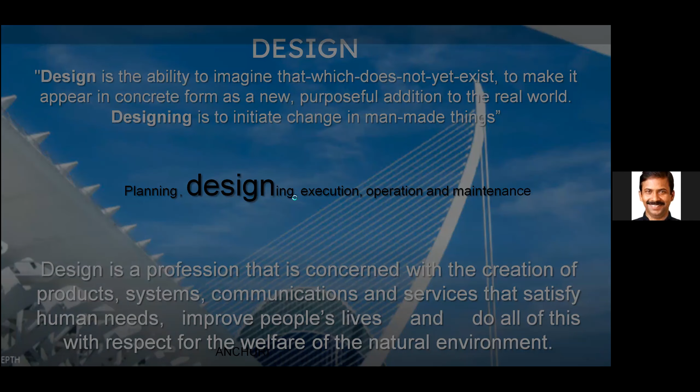So when I say categories of design, before I go into material, we need to understand what is design. There are so many - communication design, web design, information design, education design, environmental design, interior design, sound design for auditoriums. If you have some kind of hospitality sector, we need services in place, then interface is required, experience design is also there. If you have some publication, we need some write-up, then editorial design, typographic design, user experience design. So game design, emotional design, strategic design. Above all, today we have software design, which is entirely helping us do engineering design and all.

Before going further, we must understand the categories of design, so that definitely we can play an important role based on our own domain.

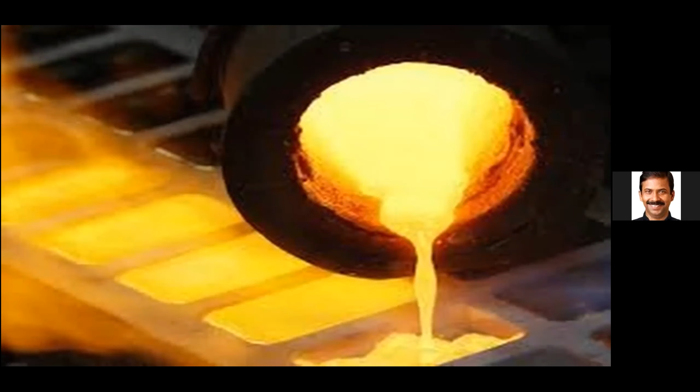Friends, you can see this piece. The moment I show it, you may be saying this is some kind of metal. This is a gold piece. This gold, when it comes from the mine, has to have some process. So naturally, when the gold is processed, then we get some kind of this form. Based on the quality of the metal, the purity of the metal, we say it's 24 karat, or 22 karat, or 18 carats. But normally this is in the pure form.

Now, when I get this, then I go further with the requirement that maybe even these ornaments - so the processing starts, and here design comes in picture. But before design, the requirement comes in picture. I think concrete and gold, they are almost there right from the beginning. In fact, we can see in the metallurgical sense, they are playing importance like clothing - they had clothing, or they used to cover their entire body with gold ornaments. So the requirement, how it goes, we need to understand.

In fact, when you see this, the Golden Temple - this entire cladding of that particular structure was done by gold sheets or gold plates. You can see here, this is the building, and this building, normally in construction point of view, material-wise point of view, same, but this particular type of building, when we clad it, became golden. You can see the reflections, you can see the sanctity of that. So we must understand the material, how to go about it.

In fact, today we are using gold for teeth also, bracing also. The purpose may be same, but we have some kind of elegance and beauty we need. So definitely, why should we not use this as a decorating piece? It's not only for ornamentation, but that serves as a purpose - that serves as a requirement of the medical things.

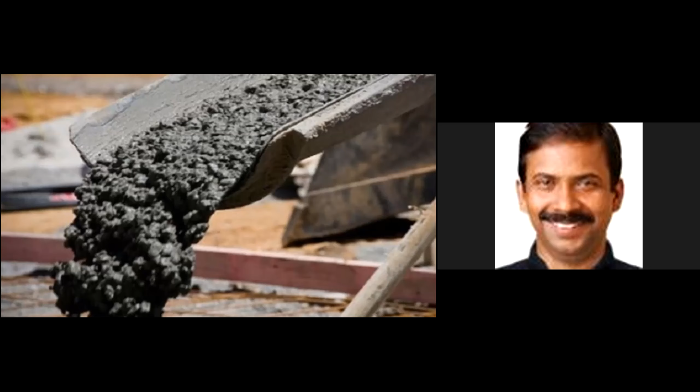That particular thing, in fact use it. So how to go about it? Then this particular thing is made. Say today we are using ready mix concrete, or some kind of cast in situ, but today we have latest technologies which can be used for the making of concrete. So this is very important when it comes to the making of concrete.

So then we change the forms. There we had the biscuit form. Here we have cubes. Now these cubes, maybe to test the cubes we might have done it, but we can make different sizes and shapes of blocks which can be used for masonry work. And it has replaced what used to be stone masonry, natural rock. So it has been replaced by artificial rock, which is concrete.

So when it comes to concrete application, friends, believe it or not, whatever material we are making, for an architect or for a designer or the person who is trying to apply it, he definitely takes care of the design requirements and the material available. So it's the period gone that 1:2:4 or 1:1.5:3 or 1:4:8 we used to say. It has come much ahead now.

Naturally, the modern structures are not like earlier structures, because the earlier structures had different requirements. Today we have a different requirement. We can't compare with the pyramids, which were solid at that time, but today we have voids. We are going towards more functional spaces. So we must understand the requirement - what we can make, some structural elements, some non-structural elements.

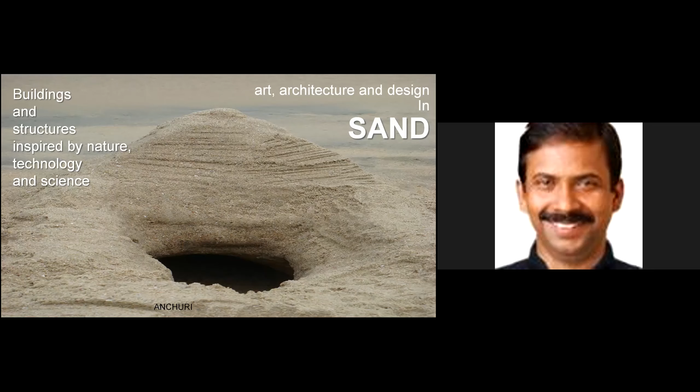But this particular inspiration got to Tadao Ando, who is one of the world-renowned Japanese architects. In 2017, the work was extensively published. Here you can see it's about 1.5 lakh square feet carpet area with a 40 meter tunnel which you go inside. Even that particular statue is about 13.5, about 40 to 50 feet. So we can see the massive scale. But I resemble this with the sand model what we saw in nature.

So we must understand, in fact, when it comes to structure as an articulation, for you or for me, maybe the load is important. When I say based on the deflection criteria, based on the spans, based on the height, based on different load resisting parameters, we have this kind of structure. It can be a plane, it can be some kind of theme. Here you can see how the articulation, how the sciography is playing the vital role.

In fact, these small changes, or this kind of rhythm, we can create by properly integrating the material, design, and concept. So today the world is for optimization, because we always feel that we should use less and we should get more.

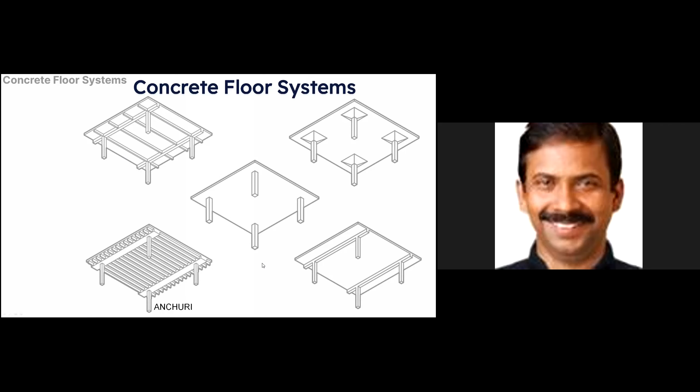So here the material plays a very, very important role, because naturally when it comes to the selection of the system, here you can see how, if I go for the post-tensioning of structures, this is very important for me.

Because every 10 floors, if I save 10%, I get an additional floor. It means just by structural design, just by proper use of concrete grades, reinforcement and design, I can save the height by 10% of what is required for one floor. So every 10 floors, I get one floor.

So if you construct about 40, 50 or 60 story buildings, naturally we are getting about 5 to 6 floors extra, which can make us affordable, and naturally the elegance also comes.

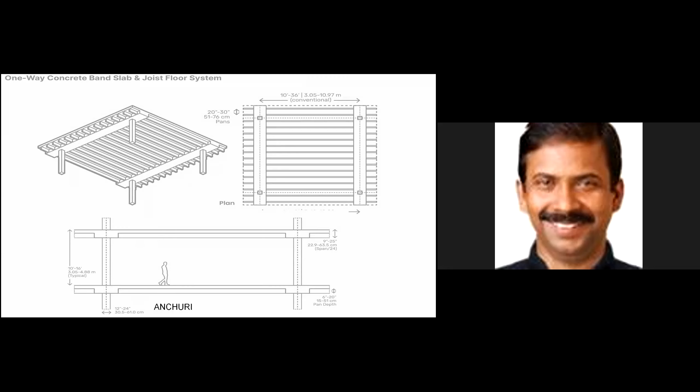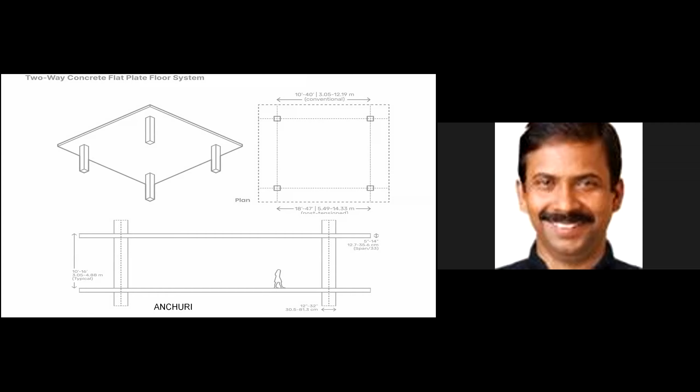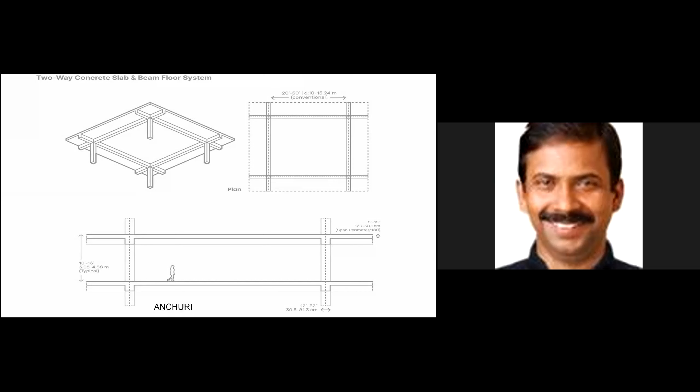So we have different kinds of structural systems, and the heights can vary accordingly. We can get clear height with one-way concrete joist, or one-way concrete slab with beam floors. Then we can have one-way solid concrete slabs, or just a slab, the flat plate concept, then drop panels with flat plate, or regular two-way beam systems. We can also have waffle slabs, which are elegant, and earlier we used to use that in many systems before post-tension and precasting came into affordable use.

So friends, here you can see decorative concrete, which has developed into one of the most important means of design in modern architecture. No other building material can be used and processed in such a versatile manner. You can see these 20, 25 year old structures, how elegant they are - the color, how vibrant, and how the sciography creates vibrancy in the spaces. We need to understand the use of that.

In fact, it's imaginative, inspiring, and catches the eye. Decorative concrete provides a connection to the landscape and the building, through forming, placing and finishing to exacting quality standards, because decorative concrete has more QA and QC. So naturally the productivity will be accordingly.

In fact, the concrete can take almost any form, any texture can be developed on it. Today, due to advancement in pigmentation, we can achieve any color, and it enhances the appearance of the building along with structural or functional requirements.

As per me, decorative concrete offers a different range of surfaces, from smooth to rough, or the spectrum of colors, as I said. So concrete, while providing aesthetics to the building, also serves as a functional system.

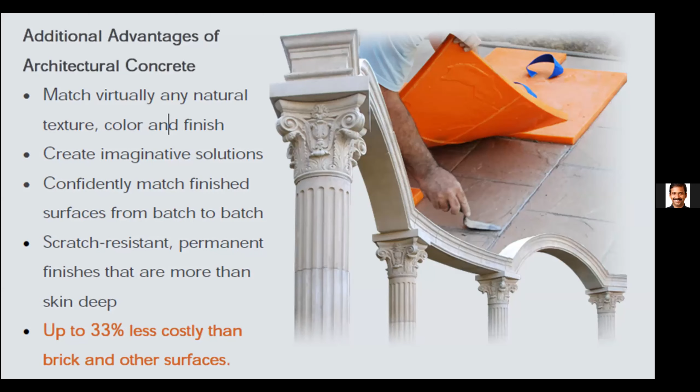The scratch resistance or permanent finishes can be really developed in decorative concrete, and as I said, up to 33% we can save on it. The concrete, which is enduring, comfortable, and beautiful hardscapes, you can see how these things are developed. For driveways, pool decks, and other exterior environments, decorative concrete treatments have become an increasingly popular choice now. Because today, if you go to resorts, common spaces, villas, or gated communities, the use of concrete is making a lot of presence.

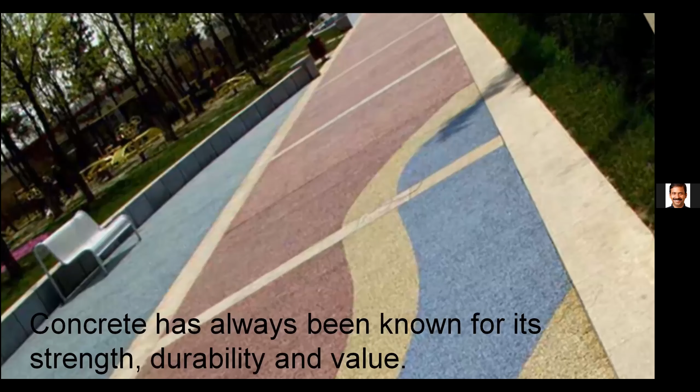So here, as an academician, researcher, or developer, we must understand the requirement of the society, because the user's mindset is very important. From there it really comes, because today we have a lot of change in mindset, since easily we can see any part of the world, any part of the globe on screen. So we know the development. It's not local - we can sit in the local and think of the global.

Earlier, we used to say concrete is very dull, very boring material. No, it's not. Concrete is a material - in fact, I can compare it with any rich material like platinum, gold, and silver.

The impression of the color and the message it conveys is of utmost importance in creating the psychological mood. If something is dull, we may be thinking that atmosphere is dull. Continuously having the same ambience, we need some kind of change. Then the color came - the color things, and we can have any color in the concrete.

So that is what integrally colored concrete is, and that is what the present requirement is. Definitely, you can develop this.

For me, white is also a color. So white cement concrete surfaces, in fact, that is iconic. I always compare it to politicians - their leadership is on one side, but their costumes, their dress, they wear a white kurta, pajama, or white attire.

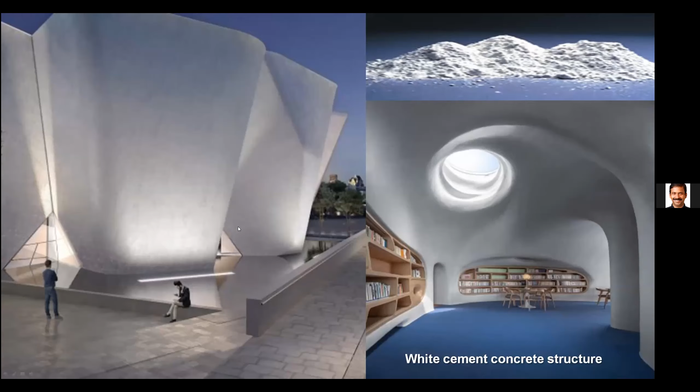So we need to use it properly. Even if you are given very good proper white cement and white material or concrete, I need to use it properly. So here the integration comes right from the conceptualization to the usage.

So today we have stamped concrete, because nothing beats the appeal of traditional slate, brick and stone paving, unless the appearance of these popular favorites is combined with concrete's long-term performance and economy of installation. As I said, we can do it with less expense, but people will accept it if it's on par with the natural things. So we must take it in a way that is required.

Naturally, the technology is on one side, but the skill is another side. If you visit Las Vegas or top-notch malls in the world, they are all in processed flooring, concrete flooring itself. There the staining, skinning, and stenciling works are very, very impressive. So here the flexibility of concrete to get the seamless or jointless flooring is very important.

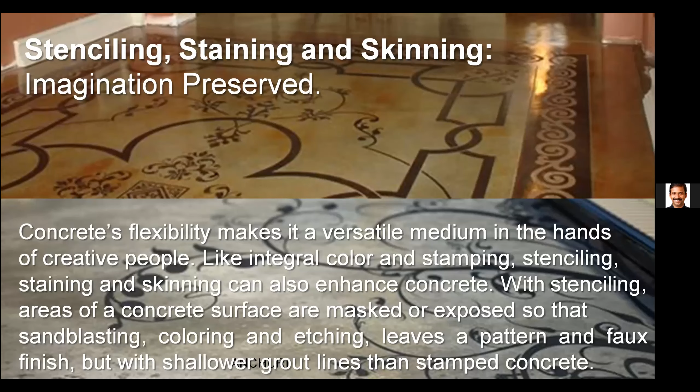So right from the industries, right from the airport pavement to the indoor microscopic level, even nanoscopic level, we can see and achieve the concrete surfaces today with decorative concrete, which is really under consideration now.

Exposed aggregate is also one of the requirements today, because of the non-slippery surfaces where you need to avoid the skidding of people. So there you can use the exposed aggregate. That is also coming up today, and we can do it.

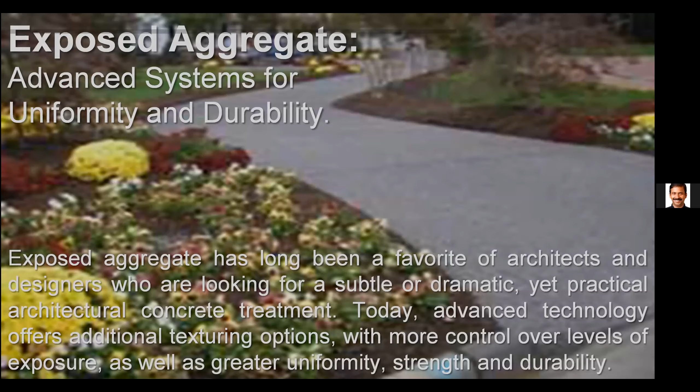Decorative floorings, as I said, offer a variety of options, textures and colors for the finishing that is aesthetic, durable, and economic. There are some advantages, no doubt there are some disadvantages, but based on the advantages, if you really do it properly, you can have it for pathways, walkways, driveways, joggings, swimmings, terraces, parkings, play areas, entrances, and industrial and warehouses, and even IT areas where the construction area is less because of the towers and more of space.

So the combination of high-rise buildings, landscape, softscapes and hardscapes, it's very important to go about it. It's not just concrete supplied in the mixer, but we need to understand the basic requirement, and then you make the design.

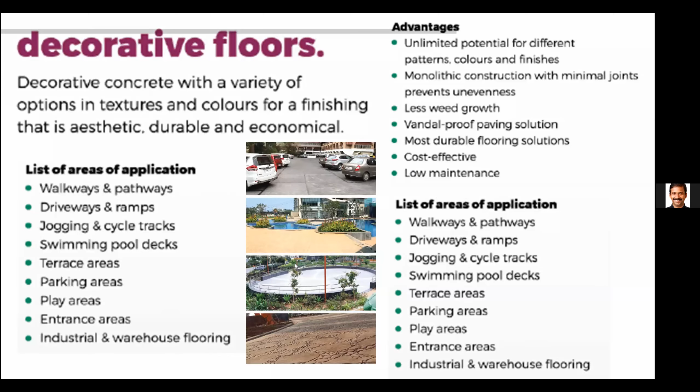I think for me, the cloth making, an assorted gamut of linen shirt fabrics. If I close my eyes and feel the texture, that's on one side. If I open my eyes and see the texture, that's on the other side. But friends, the color matters. If the same material, if I'm wearing a white shirt and stand in the sun, versus a black shirt and stand in the sun, definitely the thermal properties are different. You understand that.

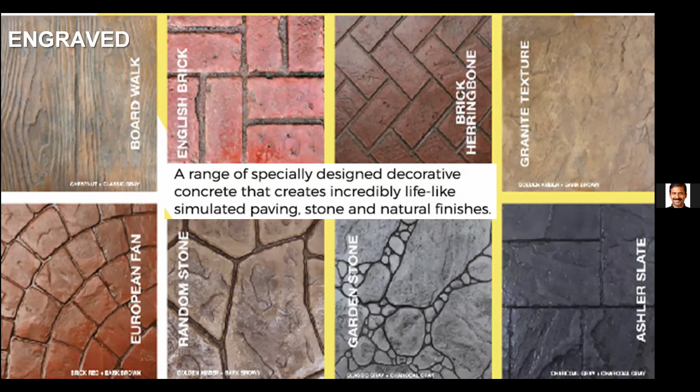So we must know how to go about it. Here the textile design comes into picture, and here the structural engineer and architectural combination works out. Here you can say engraving. I can't have regular concrete and do it; we need to specially design this concrete and cementitious products which can be engraved. So there are ranges of things available in the market, and these are common engraved products.

This is the engraved version. Today the world is three-dimensional; we are even going to the fourth and fifth dimension. So here we can use the engraved materials in a different variety of uses, based on the requirement. This is the plain surfaces.

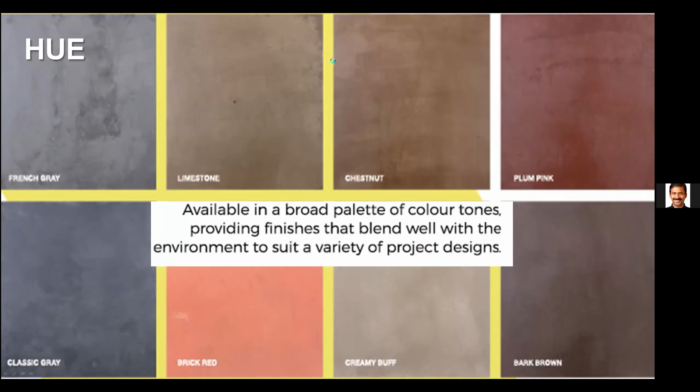So available in a broad palette, we have different colors, and how can you use it, and how can you customize it, and how can you develop these things, and this is how it looks. So based on industrial usage, or based on the terrace, or based on the pavements, you can develop these things accordingly.

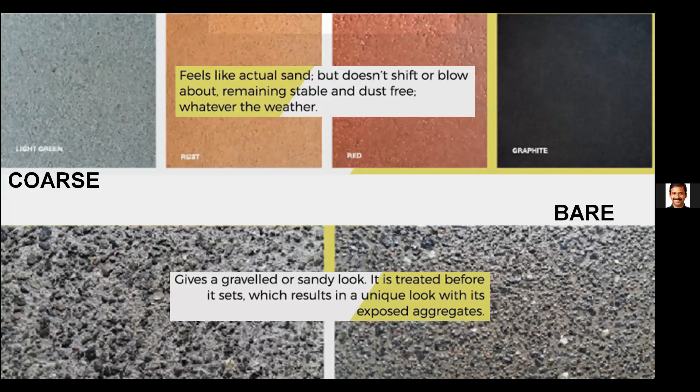In fact, we have coarse material, as I was saying, to have a textured, non-slippery finish, and these are the bare exposed gravels where you can have anti-skid properties for walking and even driving. So these are the coarse examples, and these are the bare surface examples where you can conveniently make it happen.

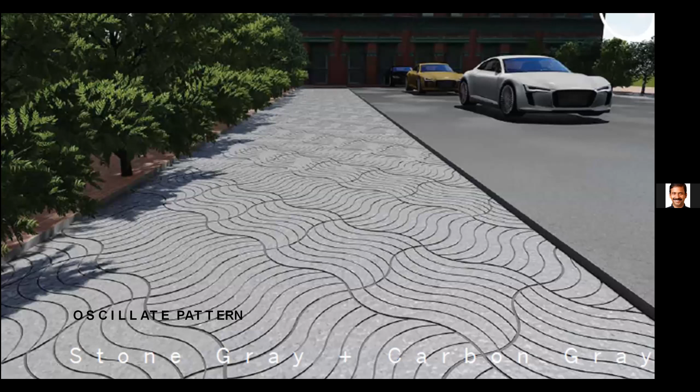Friends, I was starting with a pattern. Conceptualization is very important, because even if we create a stone gray plus carbon gray combination material, how can I use it? As I said, the clothing is important.

I can see here how the patterns can be developed, because one is utility, the other is visual, since aesthetic plays a vital role - we can't go away with that. So we need good food, good clothing, good shelter, and even good Wi-Fi today. In fact the fourth element is Wi-Fi - if you don't have proper Wi-Fi, I can't reach you properly.

In fact, clothing, shelter and food - these things are developed, they are essential. But today we need to go one step ahead and understand the requirements of the people, and accordingly develop. So here I go with about 7-8 slides showing how things change.

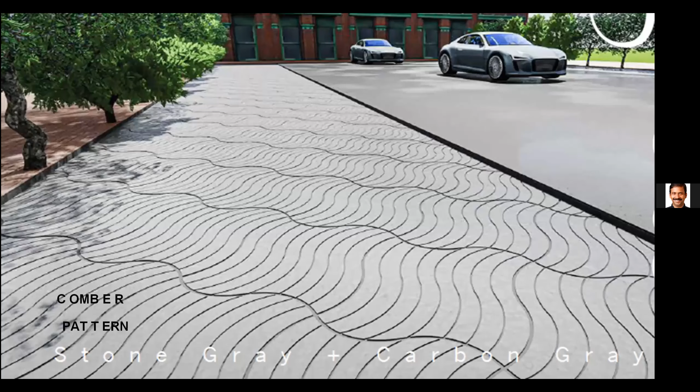For example, the same area, if I go for a Comber pattern, this looks like this. If I go for some kind of dribble pattern with a tile and different lines, the look is different. Like vertical lines - if somebody is short and wears a vertical-striped shirt, they look a little taller; if somebody is taller and wears a horizontal-striped shirt, they look a little shorter. So here too, based on the spaces, we can think of patterns which play a vital role.

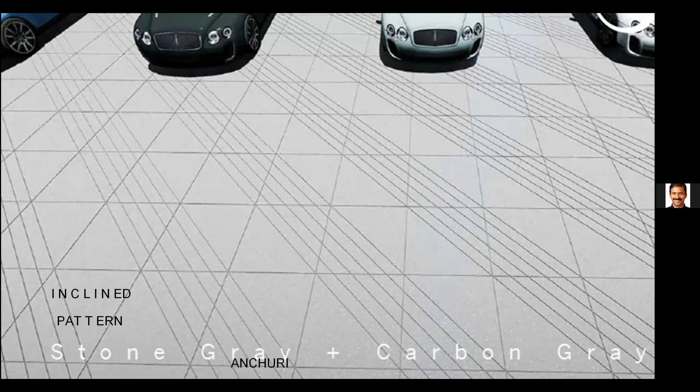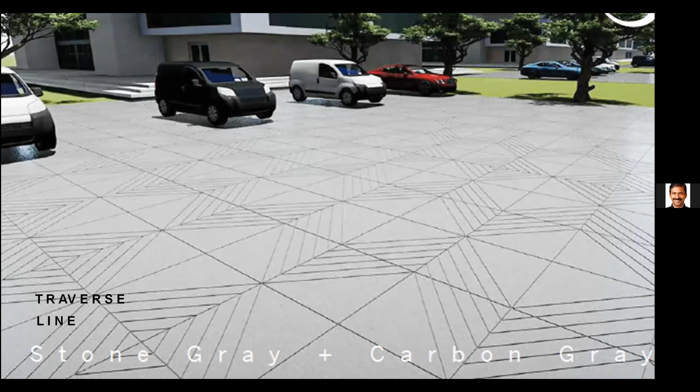But even though the material is the same, the tile size is the same, the coverage and making process and laying are the same, the pattern definitely matters. So we need to understand how the rivet lines are required - slant skews, transverse lines. The same area with small lines makes a lot of sense, or a zigzag line - this is what decorative concrete can play an important role in.

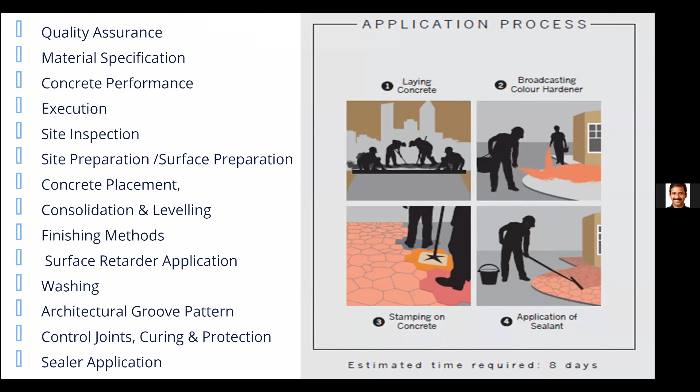So that is the difference between decorative concrete and machine-made material. We need to develop the skills and the mindset of the workers to achieve these things, and we need continuous training and continuous workshops for them on how to go about it.

General cleaning, addressing tough stains, and maintenance of stamped concrete - how this resealing is done, how to clean it using mild detergent, because not every detergent is good for concrete. We must understand what chemical reaction happens on the surface when you apply it. We must educate people, because even a cotton sari has different maintenance than a georgette sari, or different jean pants, or silk clothing - each is different. We need to understand whether it's to be dry washed or wet washed.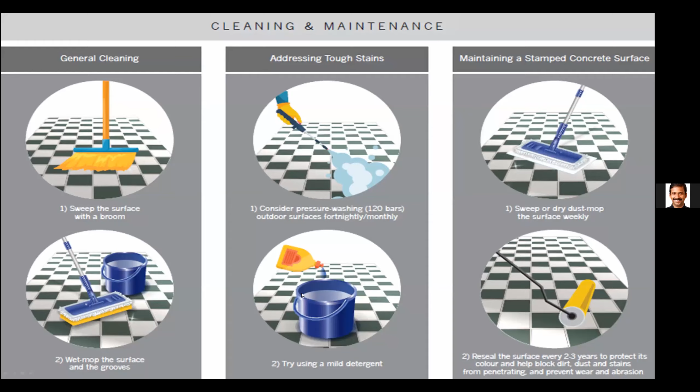Friends, before we go further, glowing concrete is also very important today, because people are coming up with luminescent aggregates, and they are going to be very common now. In other countries it's commonly used, but here too, in some pathways you can opt for it, and as affordability increases, naturally usage will grow.

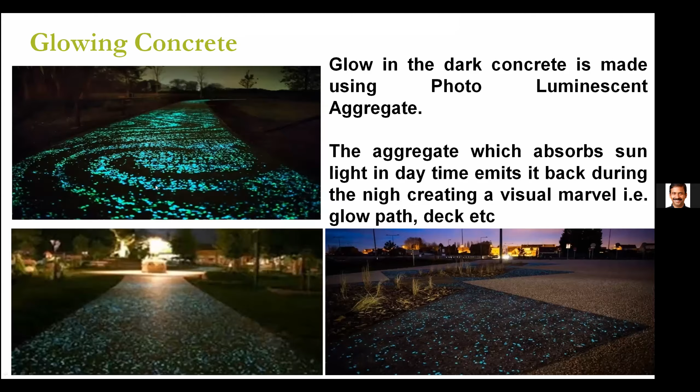You can see the glowing concrete day and night. In daytime, these 3 to 5 mm glow aggregates look like this, and in night view, here with 10 mm glow, it looks like this. Definitely this is going to be the future of decorative concrete.

Where can we use it? Residential complexes, hotels and resorts, shopping complexes, and where nighttime lighting is not there, you can walk accordingly. You can have it in building surroundings - durable solutions, easy installation, low maintenance, and design possibilities for architecture are very high. You can use it for walkways, pool decks, building surroundings, patios, gardens and terraces.

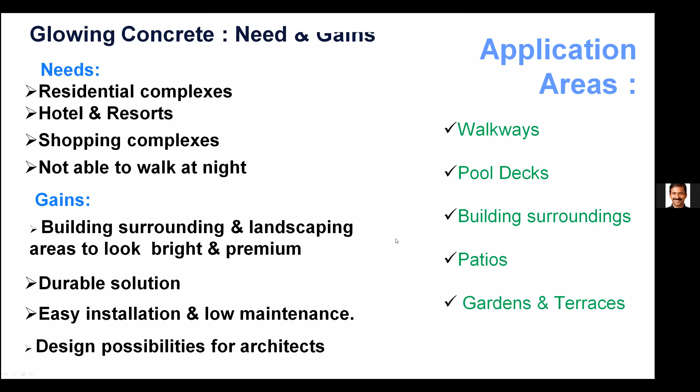So friends, applications of these things can be very important in coming days. So we must be ready. We must be ready in what way?

Being a structural engineer or a designer, or just a service provider to the architects and builders, we must be ready with our drawings. So drawings are very important. In fact, decorative concrete contributes to the visual character of the structure and must be designated as such in the contract drawings and specifications. All surfaces to have an architectural concrete appearance must be labeled on the contract drawings in order to prevent controversy during construction.

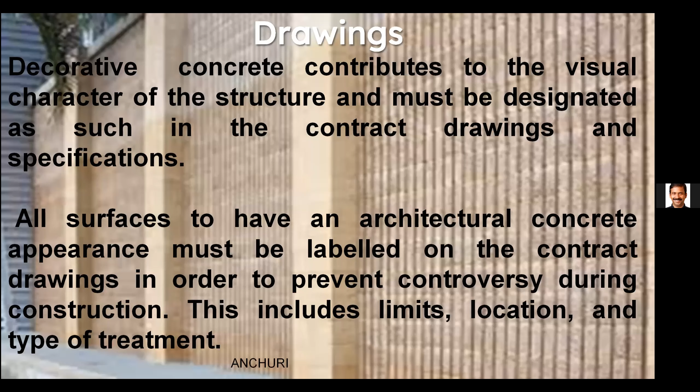Because if something is rejected, then we have to throw it out. So we have limitations, but we need to understand those limitations. We have to understand the locations, and then accordingly treat the things.

So if you are really equipped with that, naturally innumerable choices of patterns, finishes, colors, oxides and aggregate colors and cement are available to the designers to achieve the desired effect. Once the desired combination is achieved, the responsibility of obtaining the architectural product is shared by the contractor and the contracting officer.

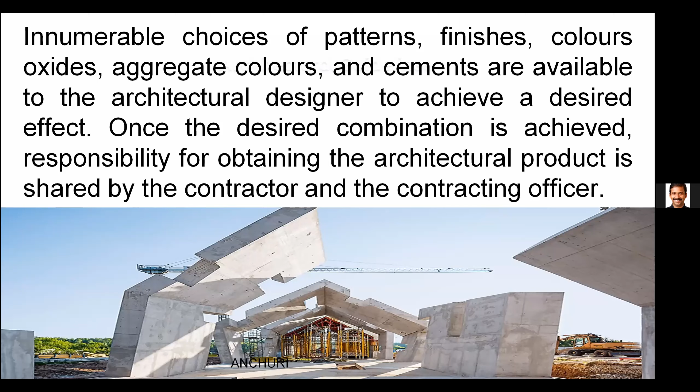So the contractors who are going to execute that must also be equipped, ready with the formwork, ready with the skilled persons and all. The acceptable surfaces should have a pleasing appearance with minimum color and texture variation and minimal surface defects when viewed from about 6 to 20 feet; we must not see those defects.

So we must understand these requirements, and accordingly the materials, finishes and patterns can be used. If something is far away, you can't make out the details. If something is nearer to you, then you can make out. For example, if you are sitting on a bench, or using a concrete wash basin, we must take care accordingly.

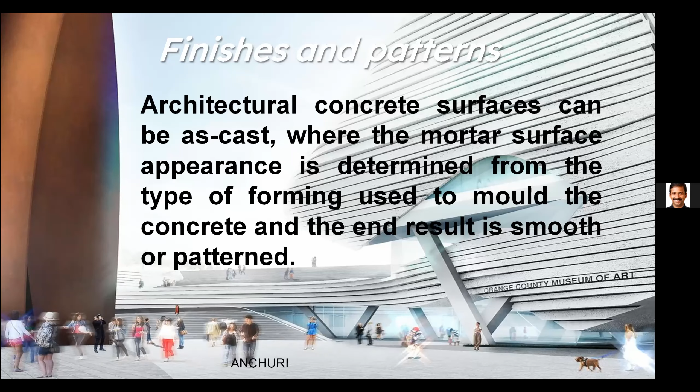So that is what we need. The surface can also be textured by removal of the mortar surface in order to expose the concrete and aggregates, which can be one of the processes.

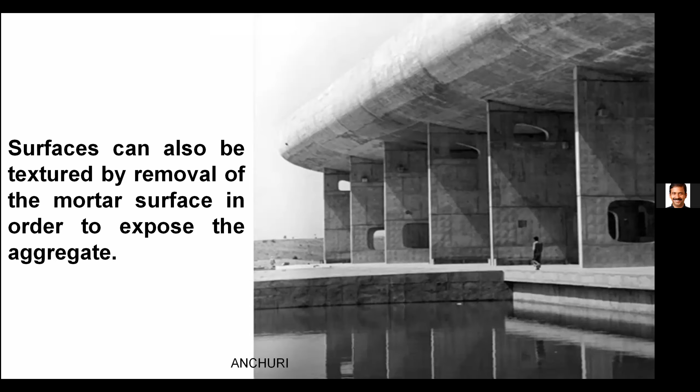Friends, we will go through a few examples before closing. The Indian Institute of Management and Business School in Ahmedabad was earlier designed by architect Louis Kahn, which is called the heritage campus. But after that, architect Bimal Patel did extensive work with the usage of this concrete and brick combination, and it's a new campus.

It's an award-winning campus. Here I feel it's not the supply of material, or the making of material, but it's the integration. The material scientist should sit right from day one on the board, and participate in the workshop right from the conceptualization, which is a little challenging today, but we can overcome it if we need to achieve the requirements.

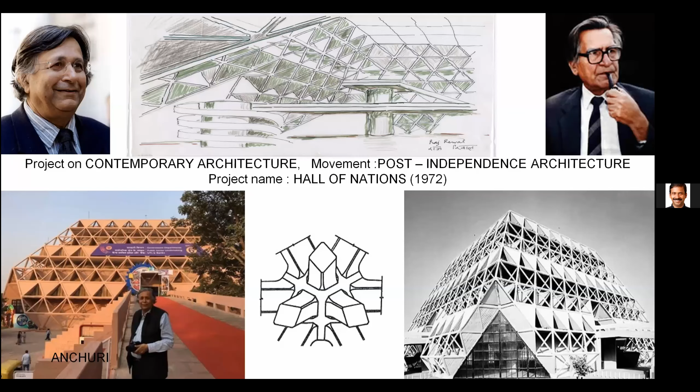Due to the Pragati Maidan redevelopment, they had to unfortunately remove this particular structure, which was only 50 years old, but just see how the integration of the material scientist, like concrete maker, and structural engineer and architect — they collectively did this for the exhibition and all. But today they have removed it for redevelopment. It's a sad story, but we have to go with the time. Hopefully the new structures will again be on par with these things, friends.

If I go for decorative concrete, I can't just go like regular concrete, but we need to go for some kind of proper drainage system, because to prevent staining, the drainage water must be restricted, and we must accordingly take care of those things so that we can have better durability.

Rainwater should be directed away from the architectural faces, otherwise those things will be damaging the structure. So we must take care of that. In fact, water — now when I say water, water for decorative concrete, in fact I have to admit those people.

Sir, I'm admitting, please. You are admitting, I thought I am doing it. Okay, right, so I will do it.

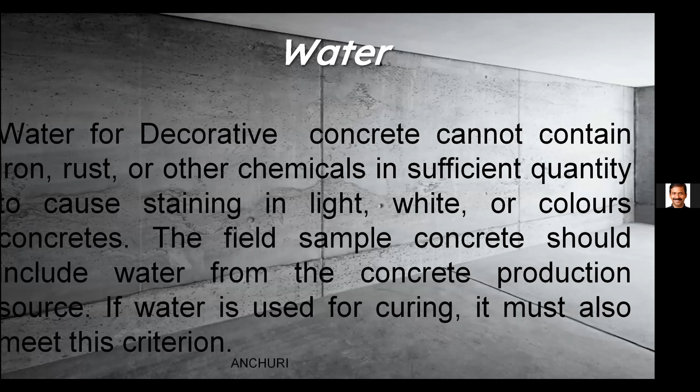Today, precast concrete facades are common. In commercial complexes or office spaces, especially in the IT sector, we have large column-free spaces with only a facade, which may use glass with passive shading methods, giving shading in a double skin system. The outer skin can be in a different material. Today people are using decorative concrete in precast concrete facades, which gives importance not only to the structure but also provides a very good feature.

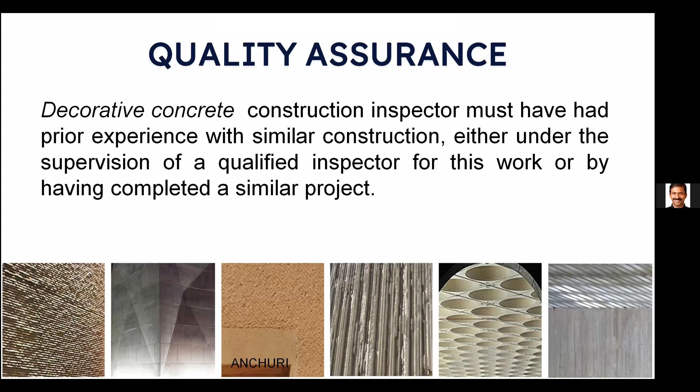When I say quality assurance, friends, other than site engineers and project engineers, we need construction inspectors. From the second or third year, if students show keenness in analysis and design, we also need to understand quality control or quality assurance. Especially for decorative concrete, the construction inspector must have had prior experience with similar types of construction. We need to take that training and continuously monitor so that the products will have long durability.

Friends, if you go through some structures, you see how the architect really thinks about the concept of design and concept of spaces. One of my favorite architects is Calatrava, who is both engineer and architect. He studies the human body, the structural or bone system in the body, joints and all, of any animal. He gets inspiration from animal structure or human body structures and uses that in the building. He takes care that minimum tension and minimum torsion are produced, so that compression elements are more dominant in the form, and concrete plays a vital role in compression.

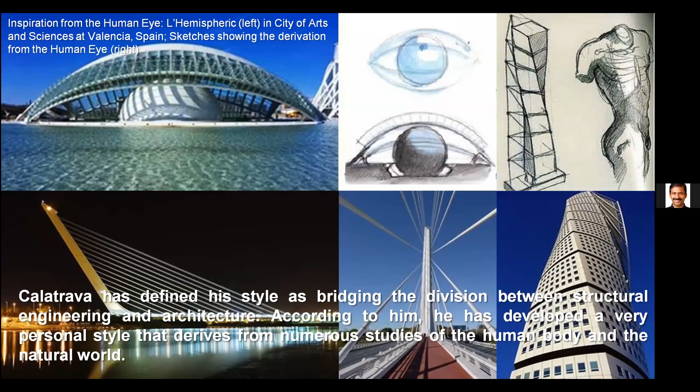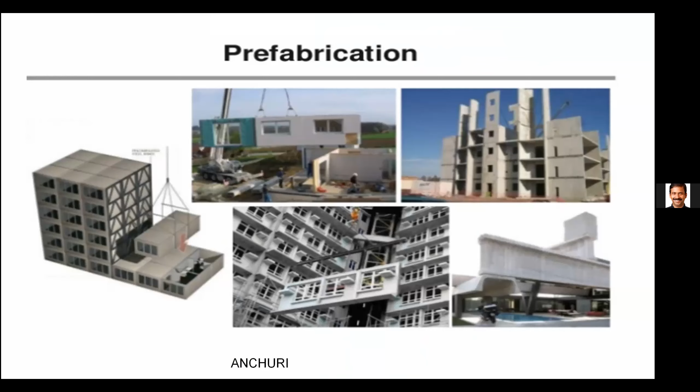In fact, technology also matters. The prefabrication system has come. We have slip forming system. We have top-down construction, we have modular construction, where this entire new materials is going to play an important role.

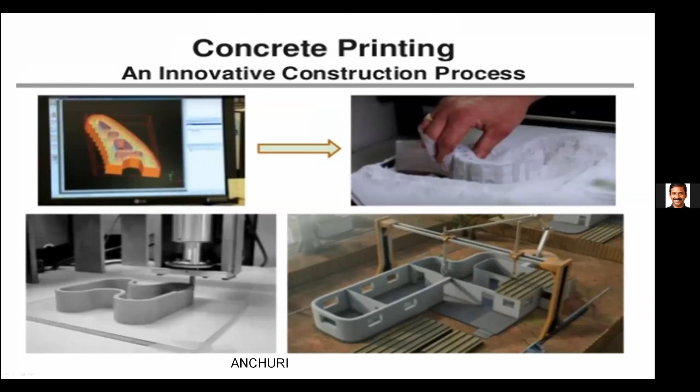Even 3D printing is not developing properly because of the lack of development of the material needed for printing. So the days are not far where researchers will give us material which can be easily used for 3D printing, so that it becomes affordable. In fact, contour crafting is the new technology where we can use it.

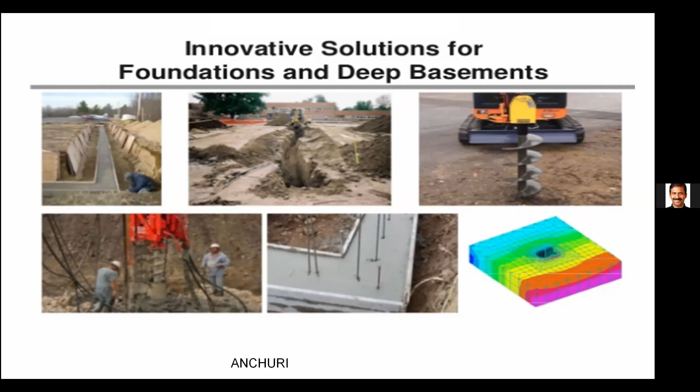In fact, high performance concrete is the requirement because of the choice of element size, the choice of spans and all - this high performance concrete definitely is going to be a part of the new. And that is what, I think, you people in these 4 or 5 days will be learning about all these things, and self-compacting, self-leveling, and free-flowing concrete.

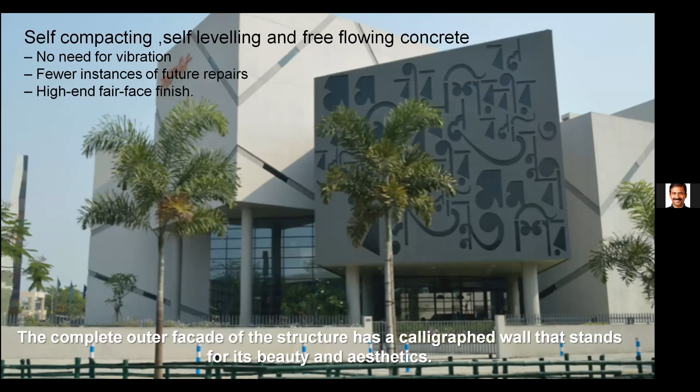And then graphic concrete - yes, the graphic concrete can go on already prefabricated concrete products. Typically graphic concrete is applied to sound barriers or pavers. You may be knowing the sound absorption can be more if the area is more. If you have a plain surface, the reverberation and reflection is accordingly.

But if you have a complex structure, if you have a graphic 3D design, then the sound absorption is different. The best example is if you enter an empty flat or empty hall, you get resounding, but when you put furniture, when you place all the material inside, then the resounding is not there. It means the surface area available inside the space increases. That's what we can achieve with graphic concrete. Also, light generating concrete is a new norm.

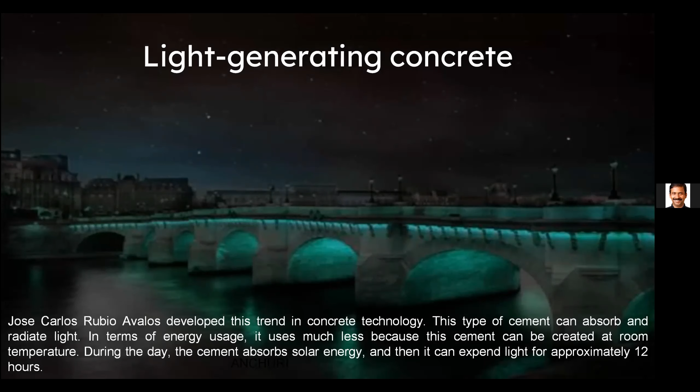Translucent cement is also one of the best requirements. 3D printing we can do. Offsite construction is one of the requirements. In fact, on the 29th and 30th, at JNTU Hyderabad and NIT Warangal, where I'm organizing a seminar, we are talking about prefabricated structures—that may be precast concrete or T-beam steel. So volumetric construction is going to be a new norm.

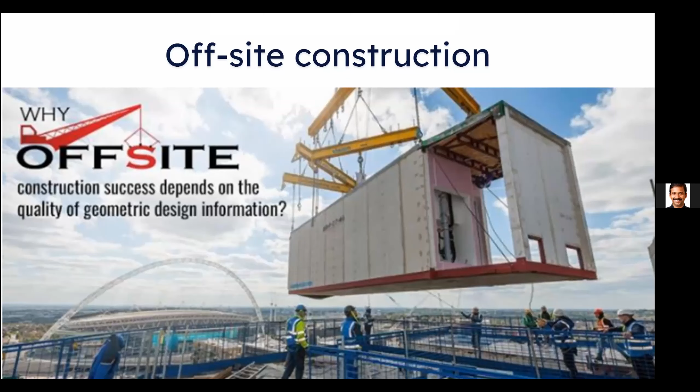And we are going to get those on a minor scale now, medium scale a little afterwards, and next year maybe on a major scale—offsite construction will be a common thing. High performance concrete for breeze blocks, furniture, and walls is common. In fact, that can be used for non-structural elements.

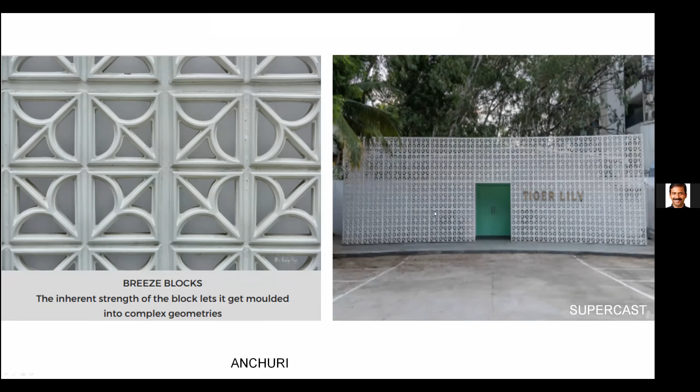This is one of the facades we designed for Tiger Lily, one of the spaces available. Instead of developing the entire thing, only the front part was done, and Supercast was the casting company—they are experts in mold making. We made it in white concrete and used this. It's attracting many young and old people of any age, with this simple facade, just the front of that particular old building.

So in fact, we can go for tabletops. We can go for any kind of interior spaces where you can use concrete. Earlier you used to see benches in parks, or some kind of sofa sets and other seating arrangements outdoors—that we can do. If we use high performance concrete, the thickness can be less.

Naturally, we can do wall cladding. People are fed up with artificial claddings like composite paneling or pressure laminations, which have more maintenance and cost. But here you can go for wall cladding. You can develop fiber cement boards or some special composition which can be used for interiors and exteriors. Here academicians and researchers can take these as examples and give them to the industry, where it can have more rustic use.

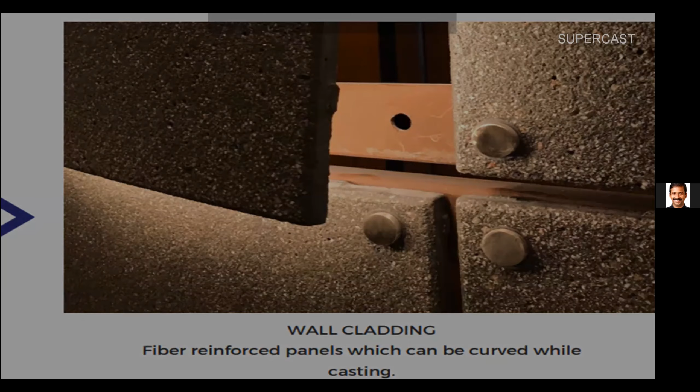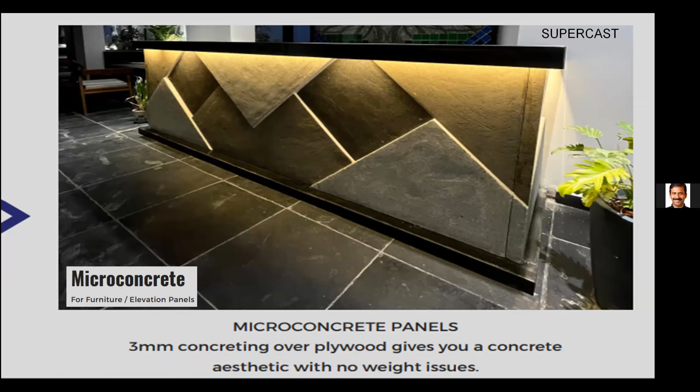So here, micro concrete—yes, micro concrete—as of today, we are using it for rehabilitation, restoration, and repair works. But here we can use it in different paneling systems. We can make these things as furniture panels or elevation panels, which is again a new trend you can think of.

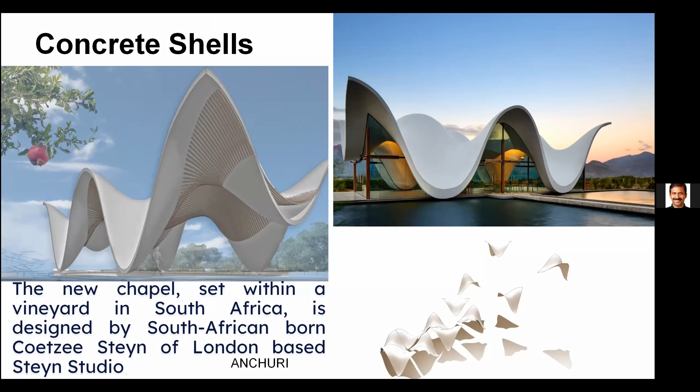Friends, whichever we see as exciting for the eyes, naturally we keep that in mind. These are all striking concrete buildings, which once you see, will be impressed in our mind for some time, and you recall that maybe Hoover Dam, maybe this particular structure. Naturally, this conceptualization plays a vital role, and the usage of material also plays a vital role.

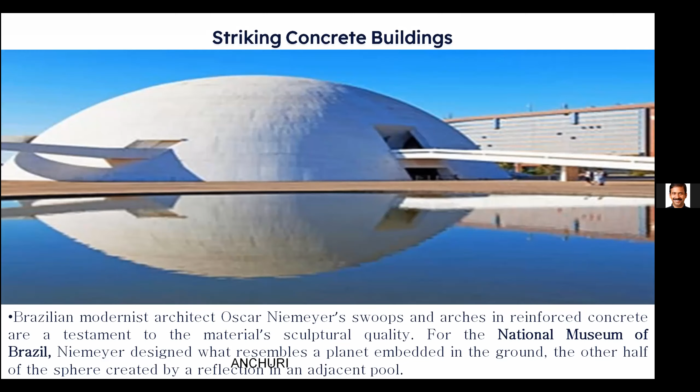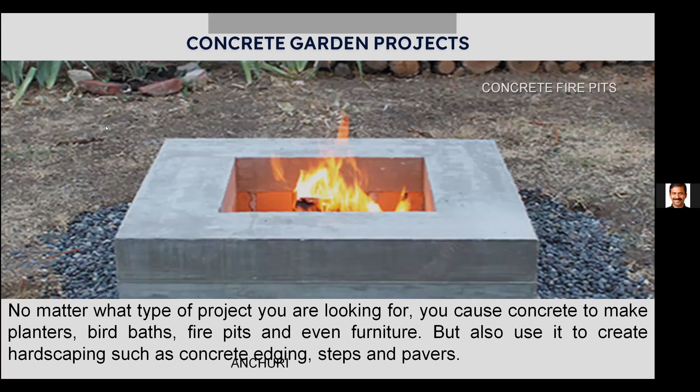So somebody just used these made balls and threw them in. These are all artificial pebbles or artificial elements, like normally used pebbles. So here we can have even colored concrete with very simple uses.

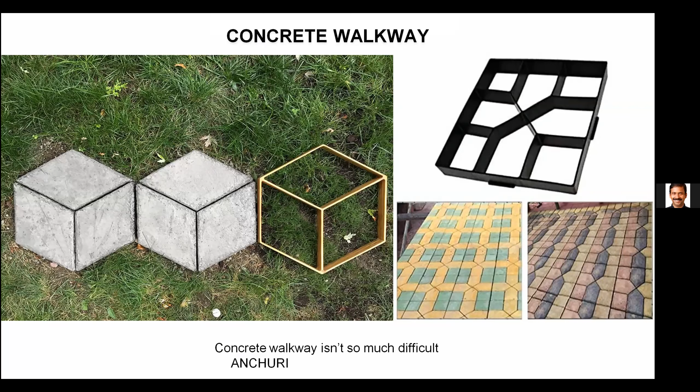Friends, you can see the concrete walkway. The moment you see it, you may think this is three-dimensional. No, this is not three-dimensional - the way the pattern is formed looks three-dimensional. But when you see it from the first floor or second floor, from a distance, you will feel that the cubes are placed there. That is the beauty of the thing. When you walk, it's two-dimensional. When you see it, it's three-dimensional. That is the beauty of the design.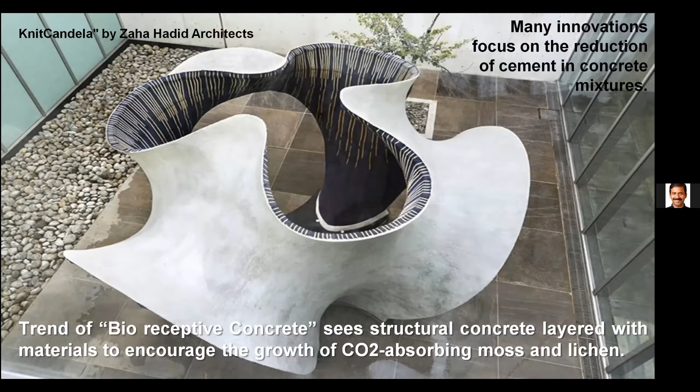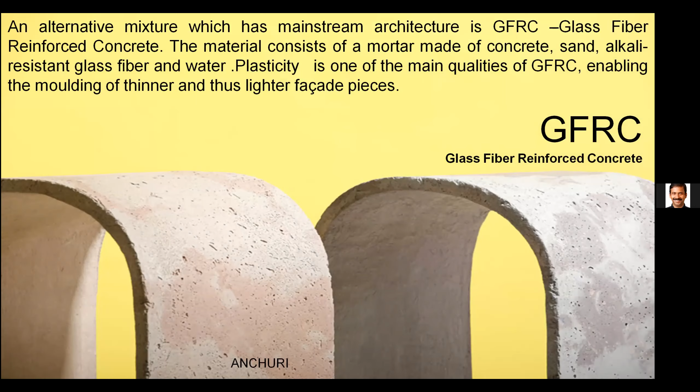In fact, GFRC is going to be the new normal very soon - glass fiber reinforced concrete - for facades. If you have seen tall structures, they have a second skin, which is nothing but lightweight concrete panels or some kind of aluminum. So long-lasting, lighter facades are in GFRC. GFRC can also be developed in colleges first, and that can be used in facades or buildings.

Here, Zaha Hadid again - why I'm giving the example of Zaha Hadid is she extensively uses challenging forms, which is a real challenge for the executors, a real challenge for the building services people, and above all, a very, very big challenge for the structural engineers and material scientists. So once you achieve it, the credit naturally goes to everyone.

The architectural concrete, as I said, commercial things, and just before we sum up, we must understand where this concrete application is basically in the architectural form, how to go about it - applications of commercial, residential, educational, transportation, facades, parking garages, and so many other varieties you can think of. So what happens is, as I said, some kind of non-building elements.

So non-building elements are what? Non-building structures - that may be tunnels, bridges, airports, which are publicly used. So where concrete is used, right from the non-structural elements to the structural elements, we must understand the requirements of the system, and then you can go for the usage of that.

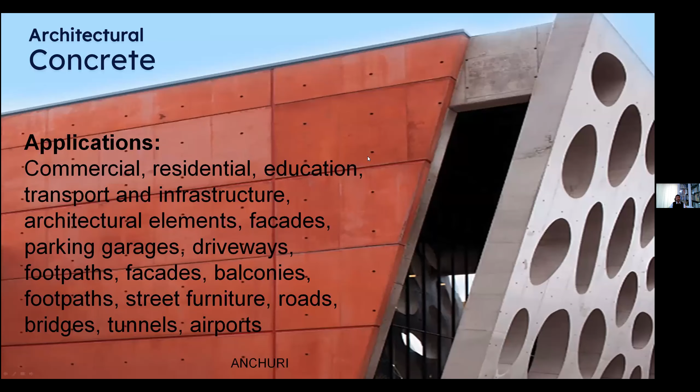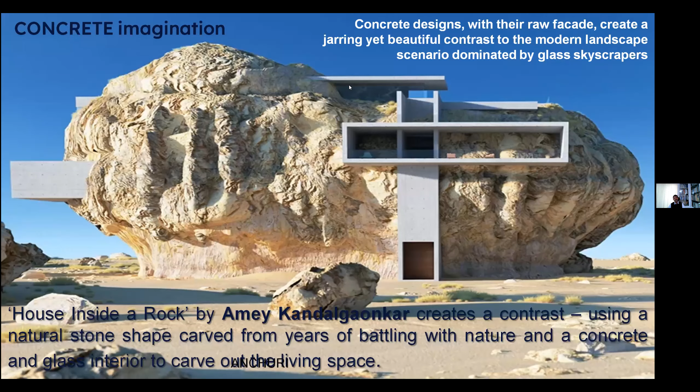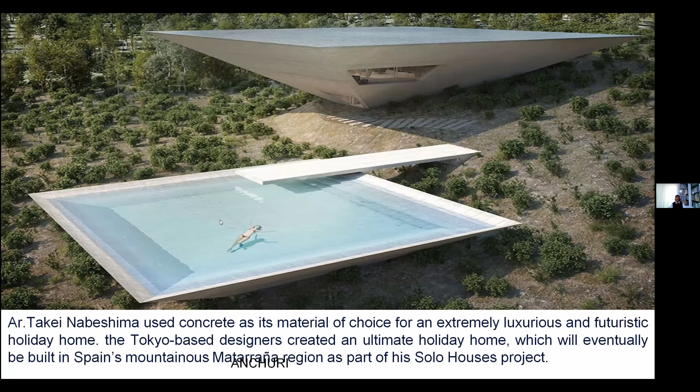So here, how this particular thing can be done, and how the spaces inside can be utilized, how these water bodies can be created, that is the challenge's task. So here the collaboration comes with the scientists, the academicians, the people who are involved in this.

In fact, today the outdoor spaces, because as we were saying, in the pandemic period, the air conditioning spaces are very less now. They are going to sit in open spaces, non-air conditioned spaces. So conditioned spaces to unconditioned spaces. Then we need to have outdoor furniture, outdoor atmospheric resistive furniture. So these things can be really developed, which are liked by the people.

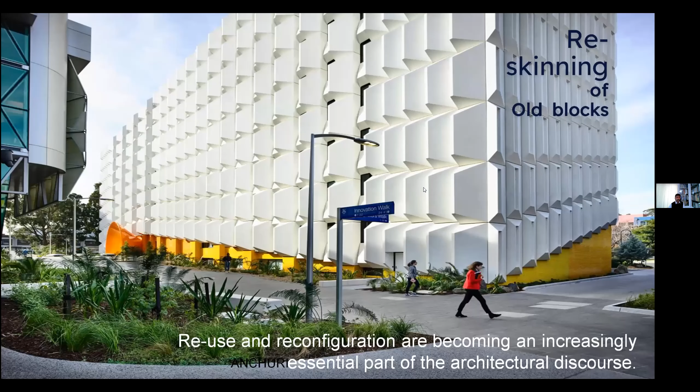Here you can see the old building is inside. Outside they have developed this concrete blocking, and they have done a facade which is new. So it's like enclosing the existing building with the required thermal efficiencies, and you can make this shaping of concrete facades. This is what people have achieved, and because it is modular, they can cast it, they can fix it. So how the joints work, how the detailing works, that we have to understand.

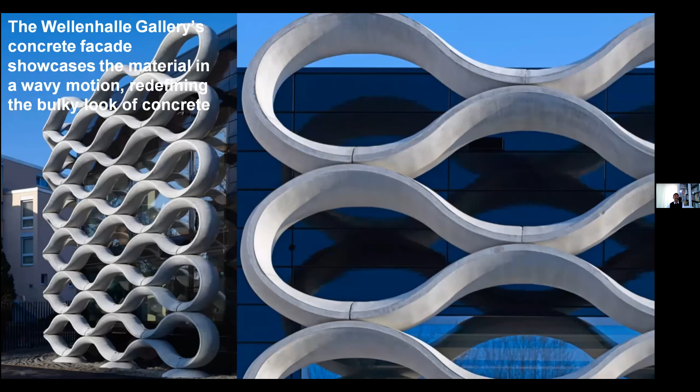In fact, this particular gallery, inside we have glass, and outside these elements, these forms, they are giving the shading, at the same time an exciting facade, which is again iconic. So this is what we need.

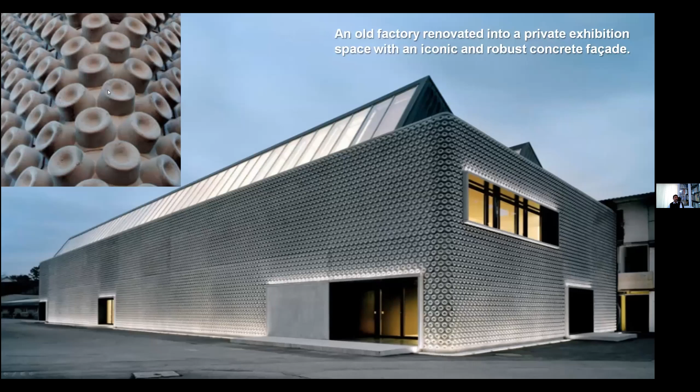And here on the left side, this is the fabric, and some kind of fabric modulations they are doing, some kind of fabric models they are doing, and the same forms they are creating in the concrete. So this is what the actual thing is. The form making is also very important while you use decorative concrete other than finishes. Here you can see this three-dimensional effect, from two-dimensional surface to three-dimensional, embossing, engraving to the embossing.

So here, an old factory renovated into a private exhibition space without disturbing the inside. They just added this outer shell, and that attracted the whole of civic society. So that became the key point and highlight of that particular city.

Friends, concrete is affordable and economical. Concrete is local. Concrete is fire resistant. Concrete can be shaped. Concrete is strong and durable. With all the benefits and value of concrete, it is no surprise that concrete is a favorite material in architecture and construction. No doubt that is made by you, that is researched by you, that is developed by you, that is tested at your institution, and that particular thing makes us use it beyond imagination.

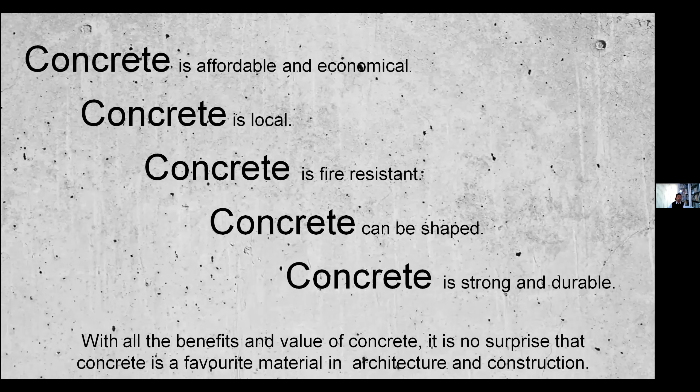Concrete has been used in construction not just now, but right from the Roman spaces. So do you think decorative concrete is new, or architectural concrete is new? No, architectural concrete is as old as architecture itself. Traditionally, how it was used, for me, the Coliseum, the concrete was used extensively, which is beyond my imagination.

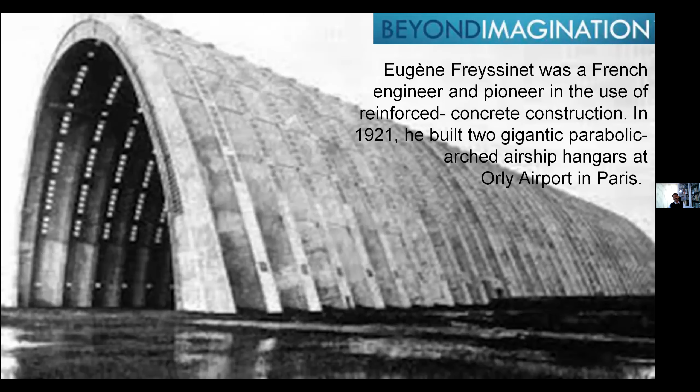So to sum up the presentation: a decorative concrete structure is a human-made construction simultaneously driven by aesthetic and engineering considerations. Such a construction can be viewed as structural art. That is what I name it.

It is the medley between the aesthetic and the performance functionality of structures that creates a seamless architectural melody. Whether an architect or a structural engineer, both are inevitable sides of the same coin and have to be considered while designing. Friends, if the aesthetic brings appeal to the concrete structure, then its functionality is the grammar. The striving for excellence in both will create the right elegance - architecture that looks good and performs better - leading to concrete applications, especially decorative concrete, which is beyond imagination.

You can imagine the application and prospects of decorative concrete in modern structures go beyond imagination. Come out of your box thinking, and create the new generation which you are producing in the form of teaching. I think the coming generation will be in par with the thoughts of architects, because today we hear that students coming out of colleges - and I am from the industry -

I hear regularly that they are not employable. Leave about that - they should be more than employable. They should be serving the society, not serving themselves. They have to come out to serve society with better civic sense. Today the requirement is housing. Today we have the requirement of infrastructure, which is again beyond imagination.

So the scope is good. My dear faculty, please integrate, because this kind of presentation may be different from your regular descriptive formulas, tables, charts. But this kind of requirement is outside, where I am connecting those formulas with the requirement and giving the product.

This is one of the proposals which was given by us in the Amaravati area, using the latest methodologies - material-wise, all types of materials and technologies. The thing can be done when you bring the people right from day one across the table, do a lot of workshops before you finalize the conceptualization, before you send it to the structural planning, before you send it from structural planning to the structural designer, then tendering, then execution, and then after handing over, maintenance and operation.